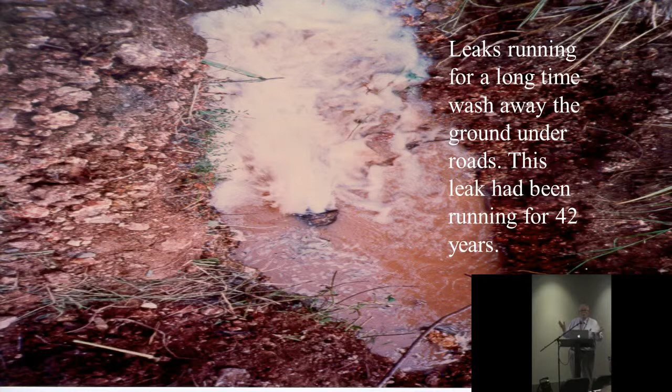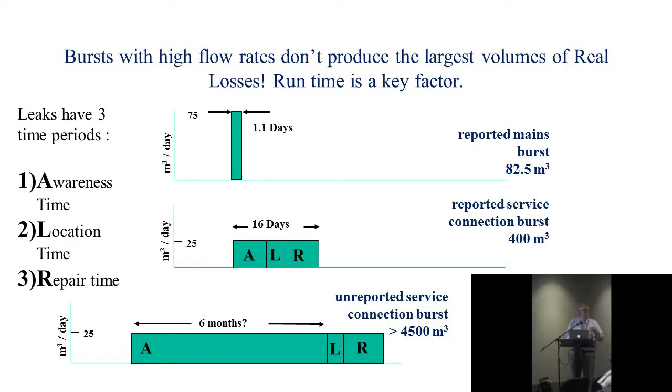There was another one only a mile away from this, 31 litres a second. Biggest leak I've ever found in my life. And again, it didn't come up to the surface. So not all large leaks do come up to the surface. Ken went over the ALR system, the issues related to actually becoming aware. And it is true, the vast majority of large leaks show up. And small leaks will run and run and leak as much as any large leak because it takes so much time to find them.

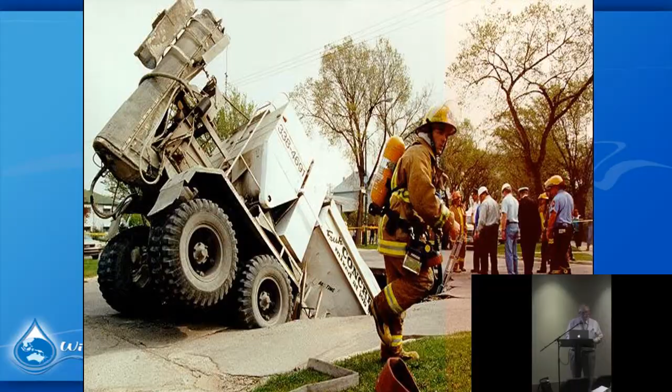People don't believe that these small leaks wash away underground infrastructure, under the roads, etc. So over the years I've collected a few photos where underneath the road has been washed away, and suddenly it won't take what's happening there. It won't take the strength. It just collapses.

This one I really like, because there's a British man in Poland here. Now, what you've got to watch is his shoes. Because while calamity is going on all around him, and everybody's rushing to help out, he never budges. He holds his bag and just watches what's going on. We'll go a few steps before this, because there's a series of photos. But now, you see, there's a woman in the car trying to get out. He's really helping her a lot. Everybody else is rushing there. No, he's still there. Oh dear. I always say, she's wondering how she's going to tell her husband where she parked the car. I find that really funny, watching him just like that. Do you want to see it again? Let's just have a look again. Here he is, look, watching the world. This is a typical Englishman. Bye-bye car. Okay, I shouldn't. I'm an Englishman as well, originally.

Okay. Right, why bother doing district meters? Everywhere I go, I try and persuade a local government, a council, a water company, or wherever, to think about district meters. These are the arguments I get back. It's too difficult. It won't work here. It's too expensive. I retire in 2 years, so I don't really want to get into it. It's a lot of work.

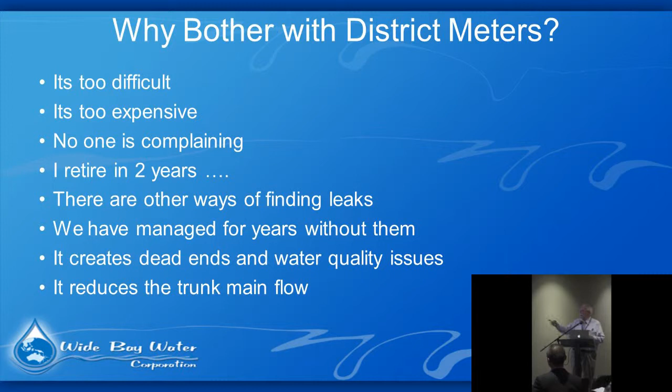And this is another argument people make. It reduces the trunk main flow. Now, if they're saying that, that means they don't really understand how to do district metering correctly, because you should always leave your trunk mains out of your district meter areas.

The trunk mains are designed to deliver water from A to B, from one side of a network to the other. You leave them out of district meter areas. I did actually leave, I used to work with David here, 1983, something like that, a long time ago.

And I got seconded by government to work overseas to help them with that. I visited back every year, and to my distress, my team had been designing thousands of district meter areas. They'd suddenly done this other city of Blackburn, and they'd included all the trunk mains in the district meter areas. And when a drought came along, they had to disconnect all the district meter areas, because of simple bad design.

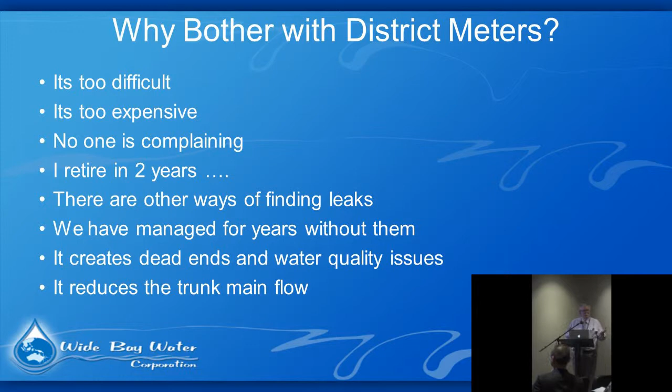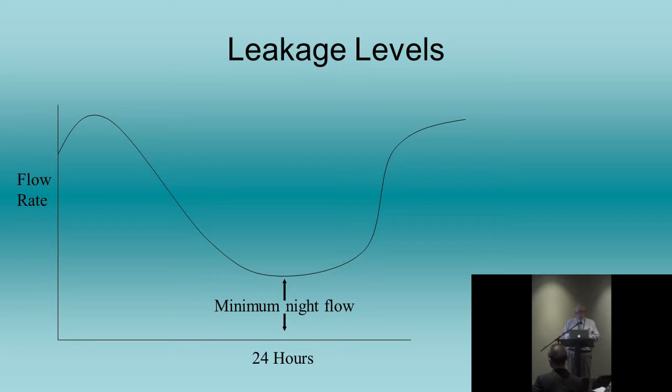Right, the reason you want to do district metering is to get night flows. You need to know that minimum night flow. Unless you segment an area to be able to measure that minimum night flow for a particular area, you're not in control. You don't know what's happening fully. And sometimes you think the minimum night flow, when everybody's gone to bed, as I think Ken said earlier, is a good indication of how much leakage there is.

This is sometimes what you find. You expect it to be low. It's not always low. This was at sort of 80% level of total flow going through. Nobody knew. This area had been set up, I think, for about 30 years, running like this. Nobody knew. Unless you actually start doing nighttime flow work, and nighttime flow work generally means being able to monitor a water main that's feeding a larger area, totally.

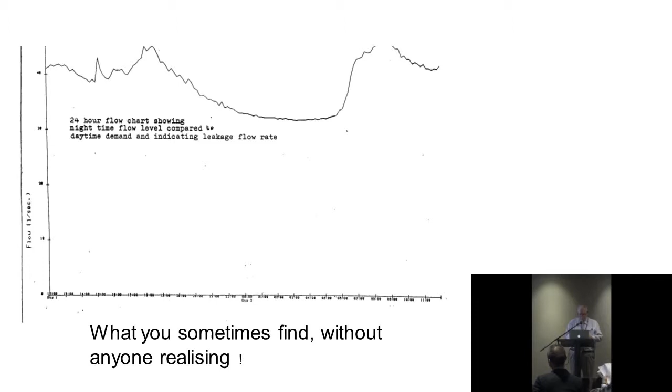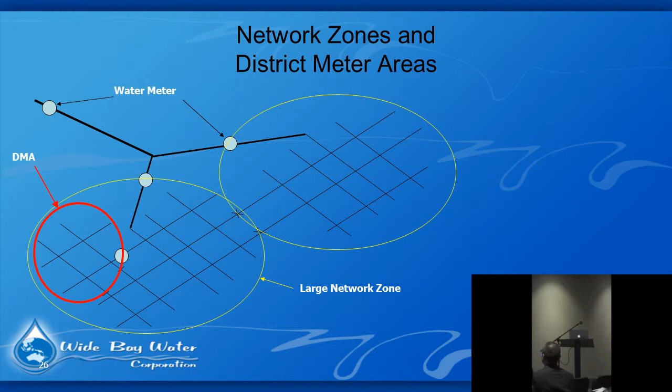And that generally means you can't do it in supply zones or reservoir zones because you have more than one feed into those areas. So you have to look at how you can separate them. And a DMA is part of that network. How can you separate it off so you can put a meter at one point measuring all the water going into that area? This would, for that area, if you close two valves there, or that would for all that area if you close two valves here.

Where do you start with this? Well, it's difficult when you look at a massive network, but my experience is you start from the outside, working in towards a city or a town area, because it's quite easy to identify the water mains that run up to natural borders like rivers, lakes, railways. They've already got dead ends, so you're not creating any more there. Find the water main that goes to that particular area, and that's a naturally formed area. You're not creating any extra dead ends.

You can find the biggest main that's feeding into that. Sometimes you have to put a bigger main in just to reinforce it, to set it up. But I would say a district meter area shouldn't have more than, say, 2 or 3 extra valves closed. 5 you can live with perhaps, but not many more than that, because every time you create a boundary, you're creating something that's likely to be opened by someone by mistake.

Or you're creating perhaps a discoloured water problem for anybody who lives right at the side of that, because dirt might build up behind the closed valve. So you should only ever really do a closed valve at least 5 metres away from any service pipe that's coming off the main, so it has time to build up and you can flush it out before customers get a problem. So I've tried to show, this is a drawing that's been used all over the world, but it's good to show how easily you can separate networks.

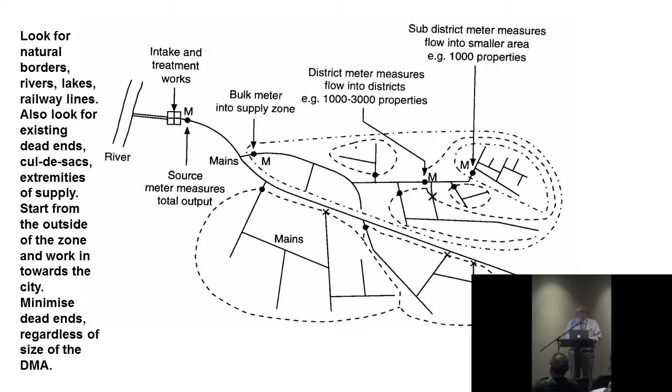So if you've got a meter in one particular spot that can measure low flow as well as high flow, you can put a data logger on it, and it will give you all the data every time you're analysing it, either for the whole area or part of it. Because this is the other wonderful thing you can do. You can step test that area in the middle of the night when everybody's asleep.

You predetermine what valves you can close during the night to shut that area down in a sequence back towards the meter. You've got a data logger on the meter, so it's got a time frame that it's recording against, and every time you close a valve and you're closing one of those smaller areas off, it registers what flow difference there is. And if you shut a leak off in that area, there's a big drop in the flow.

You know for 100% certain you've either shut a leak off or you've shut off what is a connection to another area that you didn't know, that there might be a main underground there that you didn't know anything about, but it's connected to another area. And that's quite easy to find every time you do a step. It's so simple. Not many people do step testing because they want to find other ways to find leaks generally.

For instance, using a correlator, and I think Ken might talk about correlators later. But with a correlator, I've done tests running a correlator over a whole distribution area where people don't know what the nighttime flows are. And the problem is they don't find half the leaks because they don't have the knowledge that between 2 certain valves there's definitely a leak.

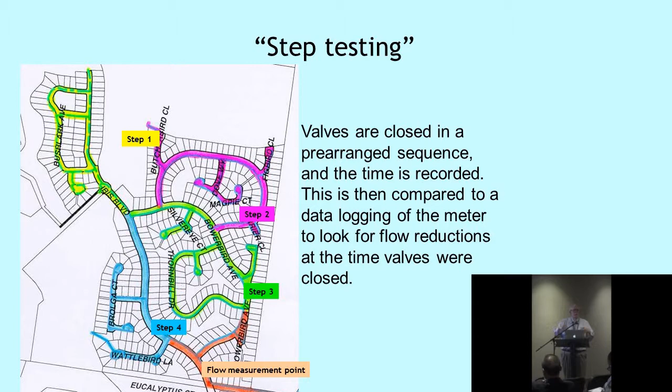If you take them back over an area that they've already correlated and they've found nothing, strangely enough, and you say there's definitely a leak between those 2 valves in that shut-off area, they will find it with the correlator because they've got the confidence. So step testing gives you the confidence for definitely knowing where to go to find leaks. Also, that night flow, you obviously only go into areas that have got a high night flow to find the leaks. That's where all your leaks will be.

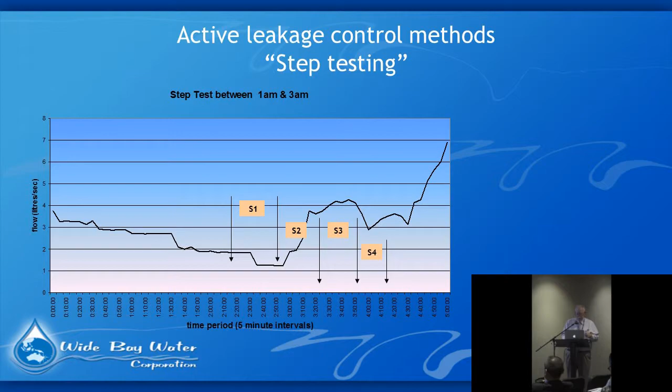So it's another technique we ask inspectors to do once they start doing step tests. Every time they close a valve, they nearly get it closed, and then they listen on it and they hear the water forcing through, and then they shut it down totally, and that sound should stop. If it doesn't, you've got a problem like this, or you've got another main that's bypassing your valve.

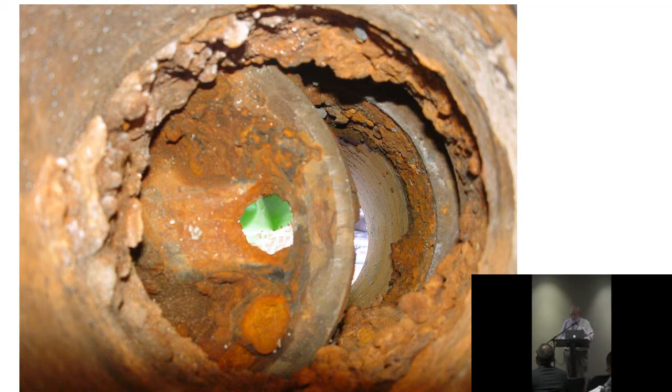You're getting lots of practical experience this afternoon.

I went back 12 months later exactly to see what the flow had gone back up to. You know where it had gone back up to? Exactly where it was when we started, just below 190. Exactly. So what this tells you is, with a pressure regime on this network and the age of the network you're not altering, you're not altering the structures, you're not replacing anything, it will always go back to the same leakage level if you stop doing detection work on it, if you stop looking for leaks, unless you alter the pressure. If you alter the pressure, then things will totally alter.

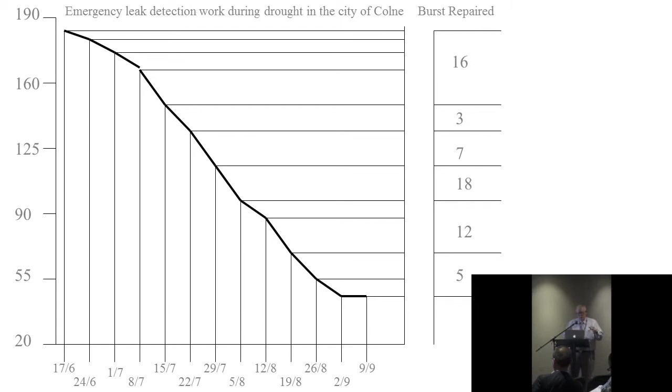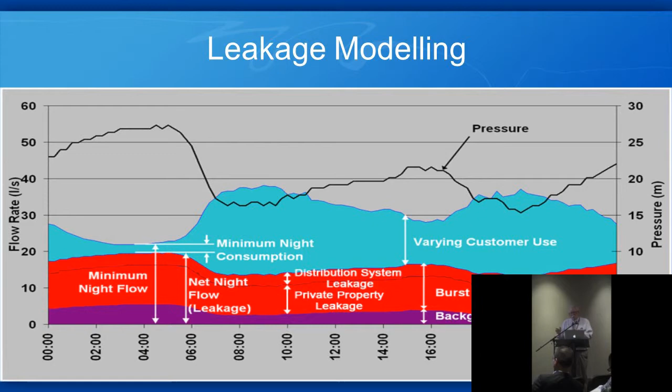Okay, and once you've got, I was talking about modelling this morning, once you've got large meters on the mains, you've separated areas off, you know what the flows are, you can start doing leakage modelling for that whole part of that network. As the pressure varies, the minimum night flow will vary and the background leakage will vary. But you can actually model all this out and know how much water is actually going for actual use and how much is not, what the rest of it is.

So district metering is a bit like a jigsaw puzzle. How can you separate off all the areas into different segments? And a common question I often get asked is, how big should they be, these district meter areas? We used to do them at about 2,000 properties, or try and do something like that. And then some not so wise people in the UK came out and said, no, the economic number should be 5,000. And so we started changing to 5,000. But then we stopped finding as many leaks. In the smaller ones of 2,000, we could find a lot more leaks.

What my advice to you all is, totally ignore whether it's 500 or 5,000, it doesn't matter. What's the easiest spot to put a meter on where you don't have to close extra valves in the system? If it's 5,000, if it's 10,000, I'm not that bothered. If it's 500, I'm okay with it. It's the quickest and easiest way and least upset to the network. And anybody doing this work, all your people will talk to you and your companies about what the right sizing should be. There's nothing more important than the layout of the network to tell you how to do that.

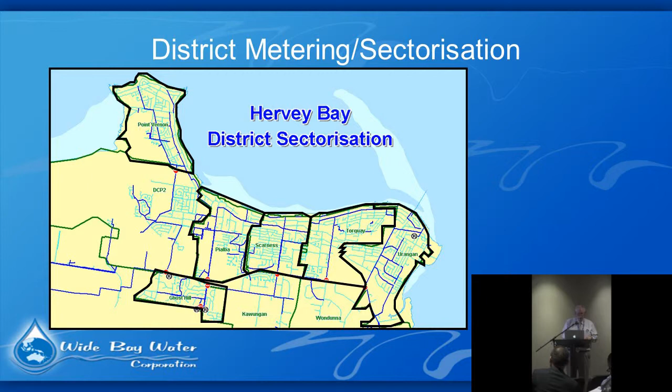Okay, so in summary, ask yourself, do you know how much water is going to each part of your system accurately? Do you know what the nighttime flow is as well as the daytime flow? Do you know it before, during and after you've done investigations looking for leaks? It's a complete waste of time going in to find 500 leaks in this area unless you can measure the results. And the results are, what was the nighttime flow before? What's the nighttime flow after? If you're not measuring, you have no idea.

And often, when you do a repair, you increase the pressure in the water main, as you were told this morning, and it'll create another leak somewhere else. You need to know that you're not doing that. You need to know that maybe it's good to move the pressure down slightly as well after you've found leaks. But wherever, you need to be able to monitor what value have you added to that system. How much water are you saving? I'm quite surprised that although you know the total volume of water you've saved from every leak, when you put the pressure back on it, you lose about a third of that benefit that you've gained.

Do you know where to send repair teams, where they're going to make the biggest impact of greater savings? Unless you have district meters, you won't get that. And the biggest question I generally put to people is, are you in control? Do you know what's happening everywhere? When you get an emergency, what are you going to use to find what the problem is? You can't be half in control. You either are in control or you're not. So it's like being half pregnant. You can't be half pregnant, half expecting a baby. You either are or you're not.